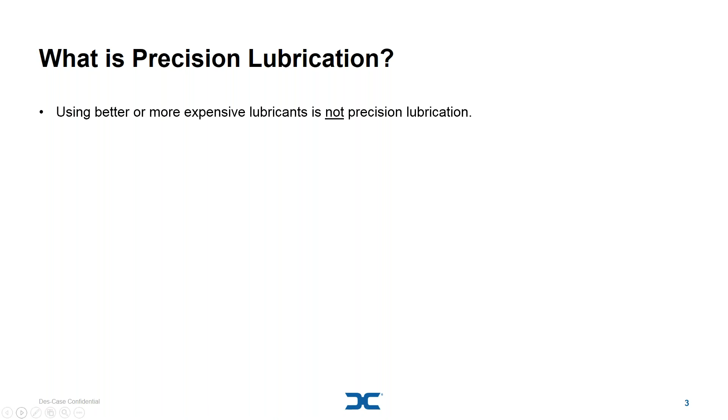First of all, precision lubrication or best practice lubrication is not about using better lubricants. Good lubricants don't necessarily equate to good lubrication. Usually that's not the case. I'm not saying that there isn't value in high performance lubricants or synthetic based products, but a lot of times the problems that we have with gearboxes are not related to the quality of the lubricant. There are other things that are more important or that are bigger contributors to the problems. And we're going to talk today about what those things are.

Likewise, lubricating your gearbox more frequently is certainly not precision lubrication. There's nothing precise about that, and it's not necessarily better. In fact, if we lubricate things more often than needed, a lot of times we simply waste time and waste resources. But in a lot of cases, we can actually cause harm by over lubricating things. Or, if we change oil twice as often as we need to, then we're really doubling the chance that we're going to do something wrong, such as fill to the wrong level, or possibly contaminate the lubricant when we add it, or use the wrong lubricant. So there's no reason to lubricate things more frequently than needed, and in fact, there is reason not to.

So precision lubrication or best practice lubrication really requires that we do quite a few things right, and that starts with lubricant specifications. We need to make sure that we're using the right oil, not necessarily the best one. We haven't gotten to lubricant performance yet, but we want to use the right one, the right viscosity grade and the right type of oil.

Then everything else that we do is really going to be about managing the condition of that oil. So we need to manage the health of that oil, which is the way we describe the chemical condition of the oil. So if an oil is in good condition in terms of its oxidation levels or thermal degradation, additive concentration, if all of that stuff is in good shape, we say that that oil is healthy. Then we also want to manage contaminants. So contamination control is going to be a big part of this, and that includes storage and handling, lubricant application methods. And then finally, all of this is made, I won't say easy, but made easier with education. If we educate all of our maintenance professionals on the fundamentals of precision lubrication, then we have a much better chance that we're going to get good results.

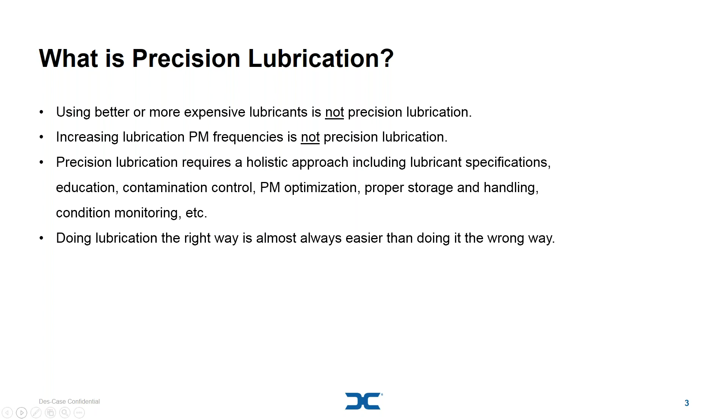Taking a good oil sample requires installation of a sample valve. We do that so we get good oil samples, but as a bonus, it makes it a lot easier to take the sample. So there's time savings, improvement to safety, environmental concerns, etc.

This is what we're going to talk about today with respect to lubrication for gearboxes. We're going to begin by talking about why it is that gears wear out in the first place—that will illustrate what we need to focus on for effective lubrication. Then we'll talk about lubricant selection, which will be really easy. We'll talk a little bit about PM development for oil changes, for inspections, contamination control or lubricant condition management, and then wrap it up with equipment modifications necessary to achieve those things. So again: why gears wear out, lubricant selection, PM development, contamination control, and finally equipment modification.

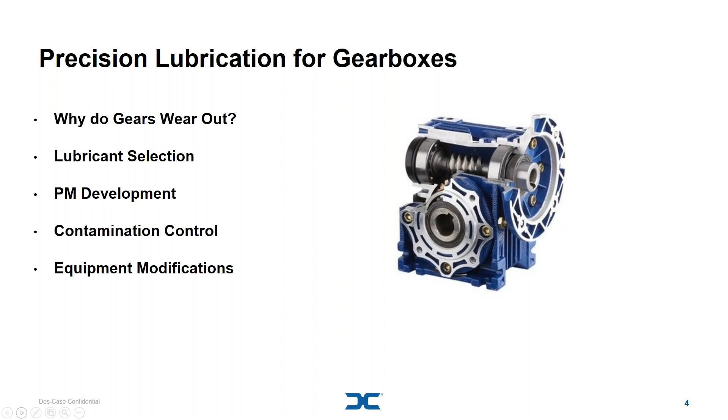So for our first section, why gears wear out. According to MIT, 15% of lost usefulness—what they call lost usefulness, I like to think of as lost service life—15% of lost service life is caused by machines just becoming obsolete, so sometimes we replace them with something newer and better.

Another 15% of the time, machines fail because we break them—accidents, either a mistake in installation or selection, or maintenance mistakes. But the vast majority of the time, lost usefulness or lost service life in our machinery can be attributed to surface degradation, which is what I call wear. So what MIT has told us here is something we all already knew: machines wear out. They're supposed to. That's the natural way that machines die, the natural way that we limit the service life of machines, by the rate of wear.

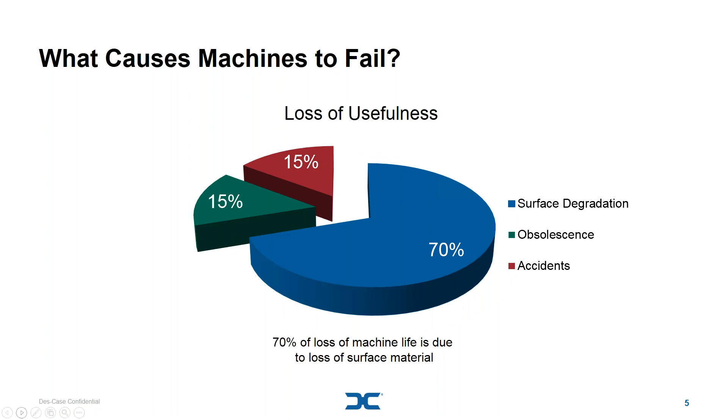So what kind of wear? We have a couple of different categories: corrosive wear and mechanical wear. Mechanical wear, of course, is the biggest piece, so that's the one we really want to focus on. But both of these types of wear are lubrication issues—one function of a lubricant is to minimize wear, another function is to reduce or prevent corrosion. So both are lubrication related, lubrication issues. But again, let's focus on the biggest piece—mechanical wear.

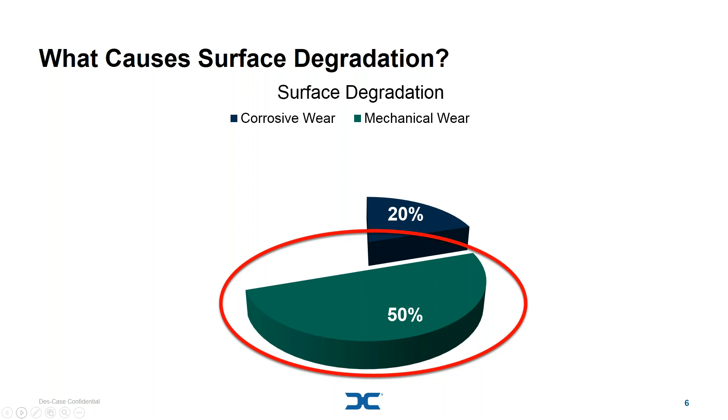If you look at the different types of mechanical wear, this information comes from a study done by STLE and the National Research Council of Canada. In this survey, they studied 3,722 wear-related failures in machines, and what they found was that in 66% of cases, the predominant wear mechanism was abrasion, 12% adhesion, 8% erosion, and 8% fatigue.

Now, adhesion—leave the other three aside for a second—adhesion is a type of wear that takes place when we have boundary lubrication conditions. That means we have metal-to-metal contact, and we don't have the proper film strength—we don't have the right type of additives, or the right type of lubricant in place. So adhesion is kind of an abnormal wear mechanism caused usually by improper selection of lubricants.

The other three—abrasion, erosion, and fatigue—are largely caused by one thing: lubricant contamination. So it makes sense that's where we should be paying a lot of attention. Particle contamination causes three-body abrasion, it can cause particle-induced erosion, and it causes particle-induced contact fatigue.

Water and air contamination also facilitate this particle-induced wear by reducing the film strength. Water and air also cause other forms of erosion—gaseous and vaporous cavitation. So my point is that the vast majority of machine wear is caused by contamination to the oil. The vast majority of lost machine life is due to wear. So if we can control the root cause, contamination, we can control the rate of wear in the machine.

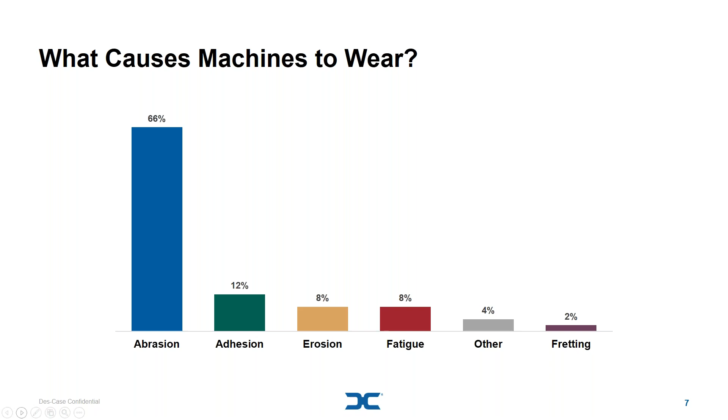This doesn't only apply to gearboxes, it applies to any lubricated machine. Inasmuch as we can control the quality of lubrication and contamination control, we can control the rate of wear in the machine, thereby optimizing the service life of the machine.

Lubrication for gearboxes can be very challenging, and one of the main reasons is that these aren't seen as very critical assets. Most gearboxes don't have circulating lubrication systems. If we had a circulating system, we'd probably have filters, an oil cooler, and a good sample valve to take good oil samples. But for a run-of-the-mill bath lubricated gearbox, we don't have any of these things.

So the oil level, when we don't have a circulating system, is very critical. The proper oil level for a typical bath lubricated gear is to completely submerge the lowest tooth on the driven gear. If you picture that, the difference between the perfect oil level and one that's too low is not very much. Having the right oil level is critical, and we can't just fill it higher because that causes a lot of problems too - it causes heat and aeration in the oil, which is very damaging.

So the oil level is very critical, and it can be challenging to maintain. There are startup issues with these, and that's not really something we can do anything about, but it is an issue with bath lubricated components. We actually have to run the machine to distribute the oil, so that creates issues on startup and certainly for storage.

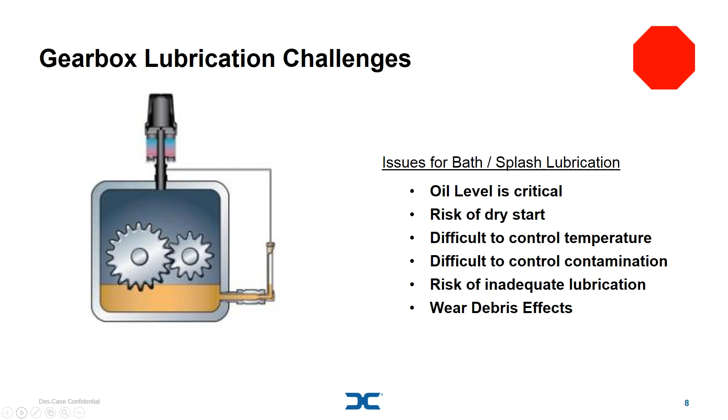Lubricant selection for gearboxes is normally really easy - we simply look in the book. We find the OEM operating and maintenance manual, look for the lubricant specification, and there we may actually need to interpret that information in some cases. Maybe it just tells us a specific product, and maybe that product no longer exists, or maybe it's made by a different manufacturer than the one we normally use. So sometimes we need to take that information and translate it into a more generic form so we can pick the right product from our inventory of lubricants.

Anytime we have a question on this and don't feel comfortable doing it ourselves, you can always call your lubricant supplier or lubrication consultant and tell them what the equipment manufacturer is recommending, and then they can recommend the correct product from their product line that'll fit that.

Now, from time to time we may actually come across a gearbox that's very old, or it may be a custom gear set, or for whatever reason, we don't have that information from the equipment manufacturer.

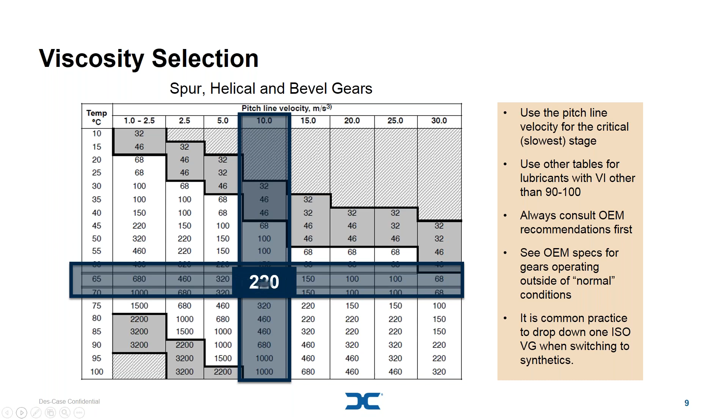So now that we have the right viscosity grade, in order to select the right lubricant, we need a lubricant type. So we're going to have to choose an anti-wear oil, an R&O oil, or an EP oil.

In the case of our AGMA lubrication standards, there's not a number here, there's not a formula, there's not a calculation. It's really a little bit subjective. In this case, they're telling us if we have moderate to heavy shocks on our driven unit or the driving unit, that we should use an EP gear oil. If we have light or uniform loads on both of those, we could use an R&O oil.

But here's the thing, it's very difficult to know. Like I said, there is no calculation, at least one that we could do reasonably, that would tell us EP or non-EP. So when in doubt, for all of our reducers—now this doesn't really apply to high-speed gears—but for all of our reducers, when in doubt, use an EP oil.

There are multiple types of EP, but our standard EP oils are sulfur phosphorus oils. And there are some times that we don't want to use sulfur phosphorus additives in our lubricants, namely with yellow metals. We're not talking about worm gears at the moment, but it deserves mention that sulfur phosphorus additives should not be used with worm gears, because sulfur phosphorus additives are corrosive—that's actually how they do their job, and they may be particularly corrosive to yellow metals. So we don't want to use them with worm gears, but we use them with just about everything else.

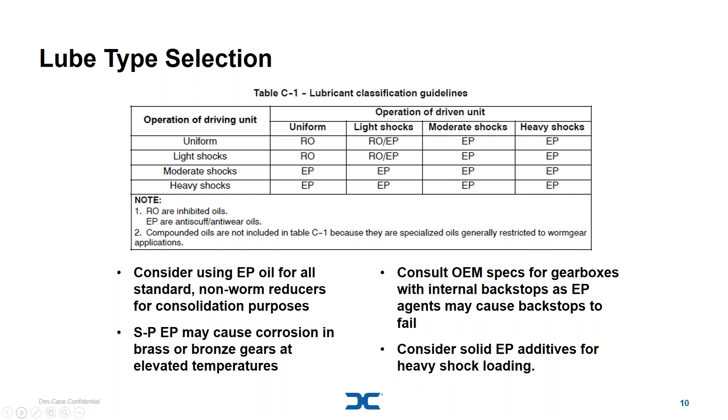Consult the OEM documentation to make sure you're using the right type of oil, because an EP oil can actually cause a backstop to fail, potentially creating a big safety hazard. There are other types of EP additives, so if we have an asset with very heavy shock loading or very severe boundary conditions, there may be times when we want to use a solid EP like moly or borate or some other type of solid additive.

Moving on to our next category of gears. Remember, we have non-worm gears and worm gears, but we're going to treat worm gears the same way with respect to viscosity selection. So if we have a certain temperature range and a pitch line velocity less than 2 1/4 meters per second, we're going to use a 680. And if it is above 2 1/4 meters per second, we're going to use a 460.

Traditionally, we use compounded oils for worm gears. Some people call this cylinder oil. It has a special lubricity agent that is very good for the type of contact we see in worm gears. Again, we don't want to use sulfur phosphorus, because if there are boundary conditions, it will likely be very corrosive to the yellow metal surfaces.

If we have an extreme case for a worm gear, if we need improved lubrication or improved film strength, a lot of times people go with a polyglycol gear oil that is actually specifically designed for worm gears. A lot of manufacturers make a high viscosity PAG oil specifically for worm gears, and it has really good lubricity and good wear preventing properties.

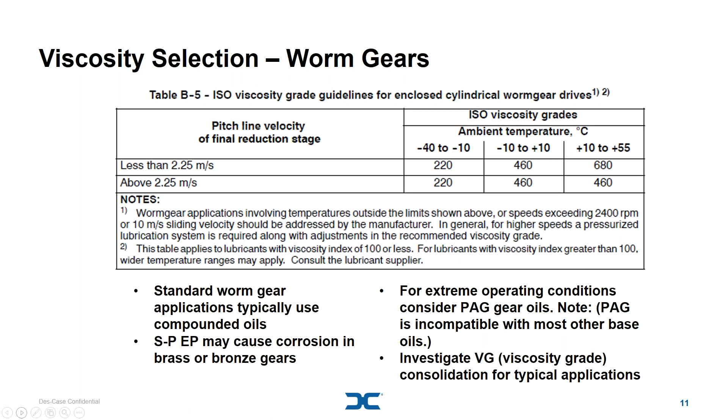Finally, if you have half a dozen gearboxes that use ISO 460 and you have 50 that use ISO 680, there's a good chance that you could use the 680 in all of them. That's something to investigate. We don't want to take a chance, but we want to verify that it's okay. Most machines can run on more than one lubricant. There's usually not one correct lubricant for a certain application. Usually they'll run on a range of viscosity grades, and often a range of viscosity types. So that's lubricant selection.

That's the first piece of precision lubrication. Now we need to focus on how we manage the condition of that oil, and the big thing there is going to be contamination control. When we control contamination, we need to follow a strategy. We shouldn't just say let's use filtration, or let's use good breathers, or let's upgrade our filters on our circulating systems. The right way to do it is to first identify how clean the oil should be.

We use particle count to measure that, or the ISO contamination code or ISO cleanliness code. We need to set a target for particle count, and a target for moisture limits, those being our two primary contaminants that we're concerned with. Then the next thing we need to do is figure out how we can actually achieve those targets. We're going to talk about what most of those things are in just a moment, the various measures we can implement to achieve our cleanliness targets.

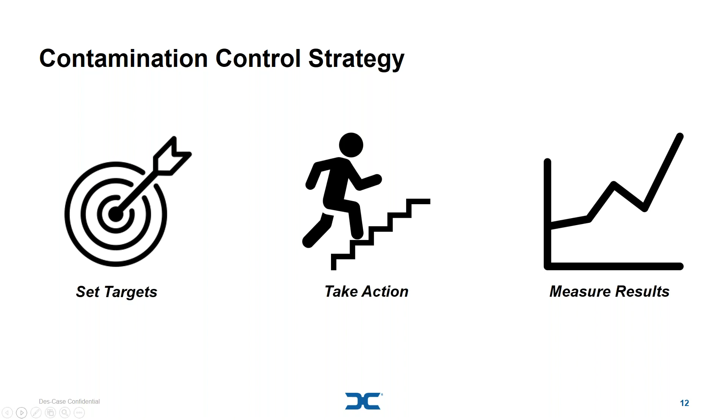Finally, we need to be able to effectively measure if those actions were actually effective, so we need to be able to effectively measure the particle count and the moisture concentration. That means good sampling and good oil analysis.

So for step one in contamination control, we need to identify our target. For gearboxes, this is a good one: 19/16-13. It's a little ambitious, frankly. That's going to be hard to achieve unless you do things very well. It will require lubrication best practices with a bath lubricated gearbox, one that doesn't have a filter built in. It's going to be challenging to hit 19/16-13.

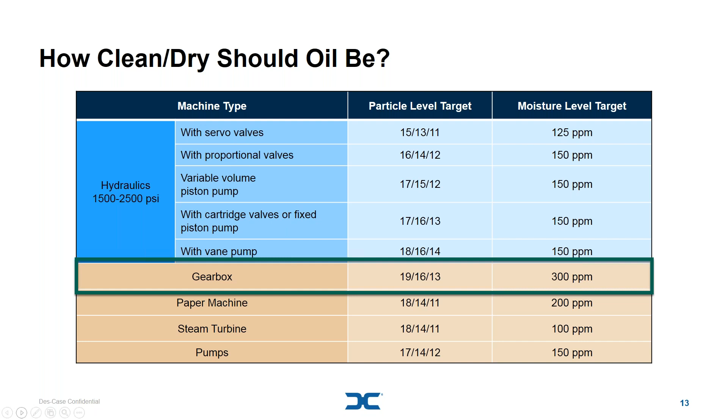And a good moisture limit would be around 300 parts per million, which would probably be around the saturation point of the gear oil. We typically want to be below the saturation point of the oil when it comes to our moisture limit, so that we don't have any emulsified water free in that system. A lot of times actually achieving that target is going to cost - we're going to actually have to change the way we do some things. We may have to install upgraded components in order to achieve those.

So how do we justify that? We know that's how clean the oil should be, but why? What is that actually going to get for us?

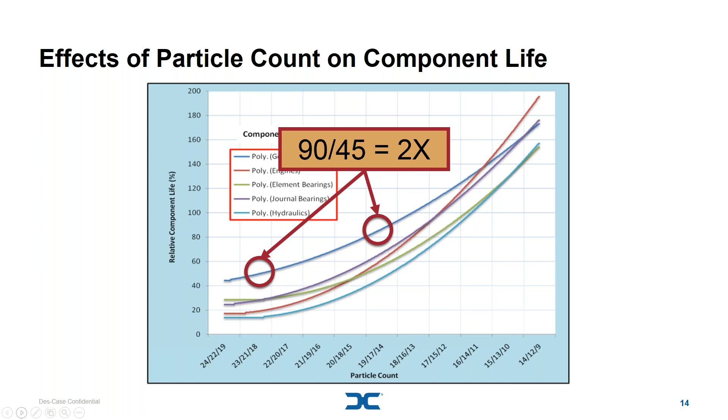And it really is that easy. It may not be easy to do it - a lot of times it takes some effort to actually hit that particle count - but at least theoretically, it is that easy.

So water certainly does cause corrosion, but that's not the primary way water causes damage. The primary way water causes damage is by reducing the film strength and thereby the film thickness, separating interacting surfaces in the machine. So the machine surfaces get closer together and more bad stuff happens.

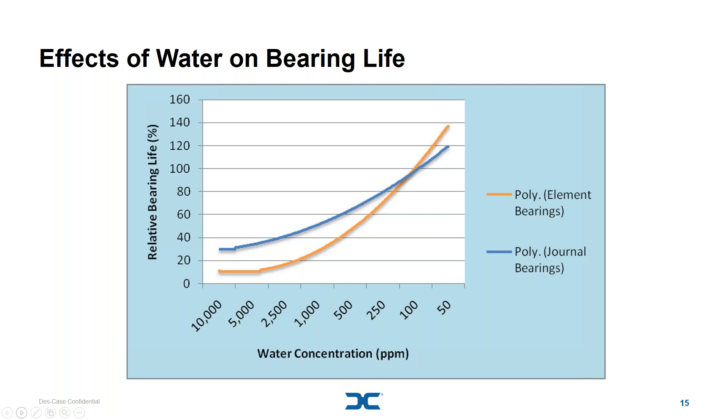Now, I always like to include a case study in short courses like these. It's hard to find good case studies on gearing because, like in the example I just mentioned, we're talking about causing a machine to run 10 years instead of 5, so it takes a long time to collect that data. But I have one here that is for final drives on haul trucks.

This is a particular copper mine, open pit mine. They've done many things to improve lubrication, but one of the many case studies they did was using offline filtration for final drives on haul trucks.

In this case, every time they had the haul truck down for an oil change, every 500 hours, they would take a filter cart and filter each of the final drives. They would do this while they were doing other things, so they didn't take it out of service - it didn't take extra time or anything.

The direct result of this was that their mean time between failure on final drives went from 9,000 hours to 13,000 hours. And their maintenance cost per operating hour per final drive went from $2.11 to $1.36 per hour.

So that's about a 36% reduction. And at the same time, they increased the life of the oil from 2,000 hours to 6,000 hours.

Differentials and final drives and a lot of geared applications have a lot of metal in them traditionally. So when that metal, in addition to causing more wear, also causes damage to the oil. It promotes oxidation. So when you remove that, the oil can last a lot longer. That's why we see a 3 times improvement in oil life here.

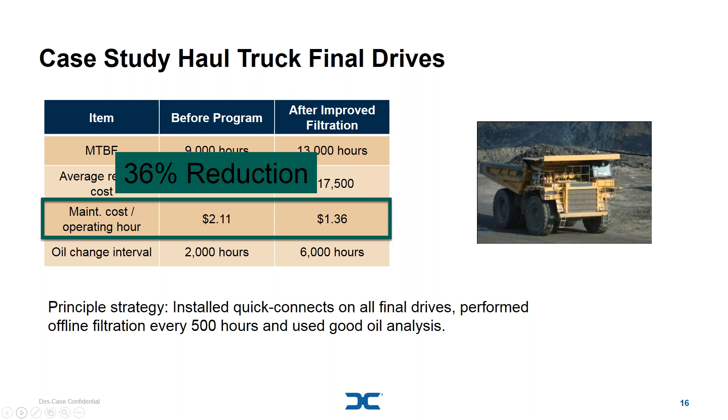So what are the things that we can do to actually control contamination? Well, the good news is that the vast majority of contamination in gearboxes comes from just 2 places. It comes from the new oil that we add to the sump, and it comes from the air that the case breathes. Those are 2 things that are, at least theoretically, very easy to address.

We can simply filter our new oil. Now, those of you that have tried this will probably know that it's not really as easy as that. Just filtering new oil doesn't ensure that we get clean oil in the machine. That can take some effort.

As far as the air that the sump breathes, there's several different headspace management techniques, but good quality breathers go a long way towards preventing particles and moisture from entering the sump. We can also use good application methods, and that's why I say there's more to it than just filtering new oil. We have to use good handling tools and good methods to get clean oil in the machine.

We could upgrade seals. We need to utilize non-invasive inspection and sampling methods. This means using sight glasses as opposed to dipsticks and level plugs. It means using an installed sample valve instead of dropping a tube into the sump or sampling from the drain line. And it also means using good flushing practices for new equipment.

So we have startup cleanliness, and even managing our spares well. That's unfortunately all we can do for a lot of our gearboxes. There's just not, we really can't justify, it's not practical in many cases to use filtration on gearboxes.

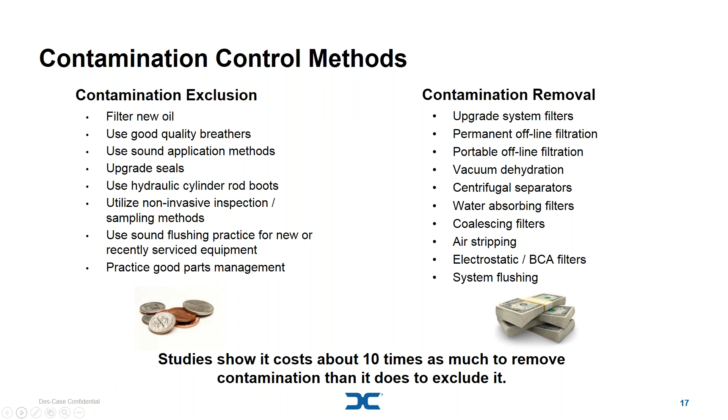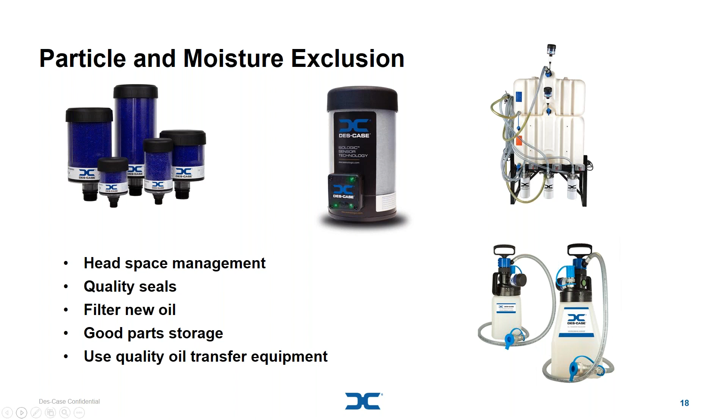One of the best ways to do that is with good headspace management. We can also upgrade seals in many applications. We certainly want to practice good storage and handling. We definitely need to filter our new oil and use good quality transfer equipment, and also manage our parts well. If we have spares sitting on the shelf, we need to think about contamination control and lubrication considerations with that stored equipment. But the big topic here for gearboxes is headspace management.

Again, most of the contamination that gets in our systems comes from new oil that we add to it. That accounts for a lot of particle contamination, but the vast majority of moisture contamination and a lot of the particle contamination comes through the breather. Most OEM breathers don't do a lot to stop particle contamination, and most of them do nothing to prevent moisture contamination other than keeping out rain or water from washdown activities.

Most of the water that gets into lubricated systems actually comes from condensation. Many manufacturing environments are very humid. So when humid air enters the sump, then the air cools down later, you get condensation inside. Anybody that has a boat with a fuel tank knows this. You always have water in the fuel tank on a boat because it breathes.

You get humid air inside the tank, it cools down, and you get condensation. That condensate falls into the fuel or into the oil, and you have water in the system. So the easy way to prevent this is to simply use a breather that stops the moisture. A desiccant breather will pull moisture down to about 25% relative humidity.

There are other ways we can do this. We can use a hybrid style breather that incorporates an expansion chamber, or just an expansion chamber that traps the volume of air to be exchanged, preventing exchange with the outside ambient environment. We could also purge the headspace with dry air or nitrogen, or even use an oil mist system nearby, running it into the headspace to prevent anything from coming in.

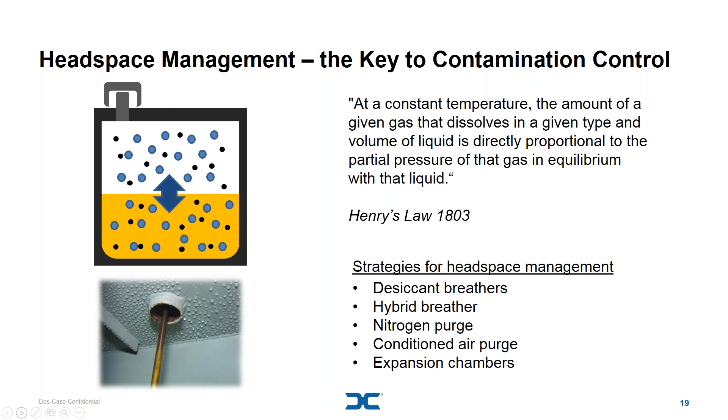So in this case, we're actually using the filter cart to remove the waste oil, which gets the old oil out faster and more completely, which is a good thing. We have bypass valves on the filter cart that can isolate the filters so we don't have to run the old oil through them if we don't want to. Then we reconfigure the system and pump new oil through the filters into the case.

And in this case, they've actually taken that a step further. Once they've added the new oil, they reconfigure so they can circulate the oil in the case and make sure that it's clean.

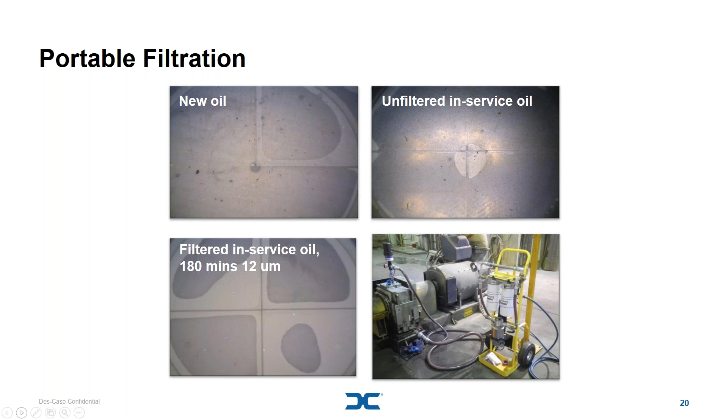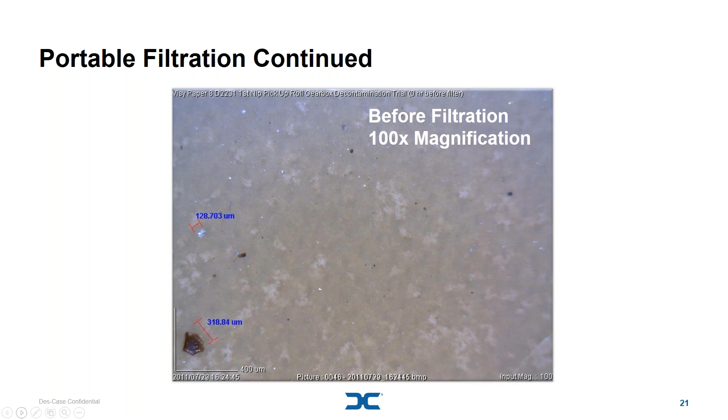This is a microscopic examination of those patches. Here we see the unfiltered in-service oil, and as you can see, we have some very large particles in there and a whole bunch of small ones, most of which are very damaging to our gears. Then in the next picture, we see a microscopic examination of the filtered oil.

When you consider that those particles we see on those slides are the number one contributor to machine wear, and really the ultimate determiner of the service life of that asset, it certainly makes sense that we could get twice or even three times the life out of a gearbox by going from the previous oil to this oil.

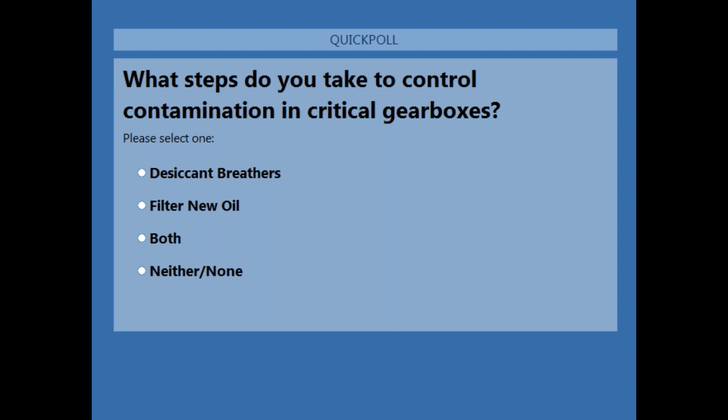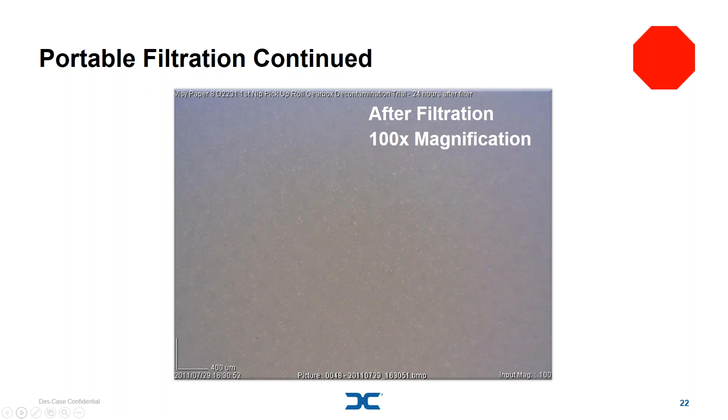So now that we've talked about how to select the right oil for a gearbox - that's easy - and how to manage the condition of that oil, how to prevent and remove contamination - not necessarily as easy - we need to talk about another aspect that enables all of those things: modifications. Usually when it comes to implementing precision lubrication, this is the physical work that has to be done, in terms of changes to the equipment and the program.

If we want to use filter carts to change our oil instead of traditional methods, we need quick connect fittings on our reservoirs so we can actually use the filter cart. Otherwise the filter cart is pretty much worthless. So this is a huge issue, a huge part of implementing precision lubrication.

If we want to take an oil sample, especially on a gearbox, we need to install a proper oil sample valve so we can get good samples efficiently. If we want to prevent moisture and particles from entering the headspace, we need to modify the sump with a breather, an air purge, or something else.

There are basically three reasons that we modify equipment. We modify equipment to enable certain lubrication activities we may not be able to do now, such as adding oil with a quick connect hand pump top-up container. So we need modifications for lubricant application.

We need modifications for inspection. If we want to check the oil level regularly, we need a sight glass. Level plugs are really inefficient and a good way to contaminate the sump, and dipsticks are also a good way to contaminate the oil. Finally, we need modifications for contamination control. So we need modifications for lubricant application, contamination control, and inspections.

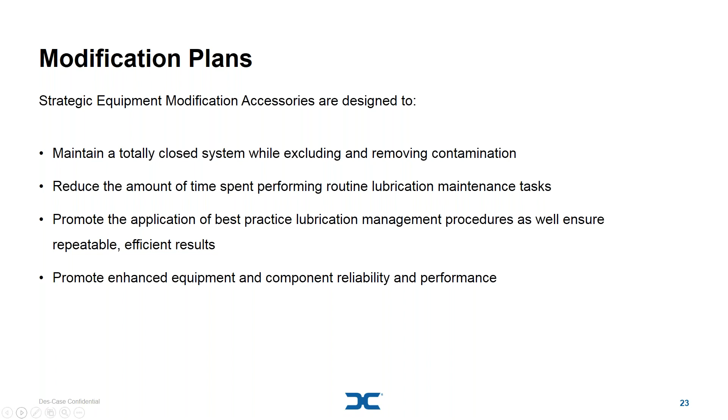This process of modifying equipment can actually take many years. I'd say on average, if you really went at it, it would probably take about 3 years to modify all of the assets in your plant - not because it's such a big job or because there's so much work to do, but because it requires access to the equipment, and in many cases requires that the asset is down.

If we're going to add a sight glass or a sample valve or something below the oil level, we've got to shut the machine down to do that, so the right time to do it is normally during an oil change. If it's something above the oil level, like installing a breather or a quick connect so we can add oil to the sump, that's something we can do right away.

But the first and most important step in this process is to identify the preferred configuration. You don't necessarily have to do a modification plan for every single asset in the plant - you can create a few templates that make this entire process pretty easy.

So for all of your gearboxes, you may need 4 or 5, maybe 6 different templates that you can apply to all of them, depending on what type of modifications you want to do and what type of gearbox it is. A lot of times, what type of gearbox it is will really affect where we install things, since different gearboxes will have ports available in different locations.

So again, the crucial first step in this process is to identify the desired result, identify the preferred configuration, and then create a parts list with any specialty parts that have to be ordered to do that modification. Then it can be scheduled efficiently when that equipment is available.

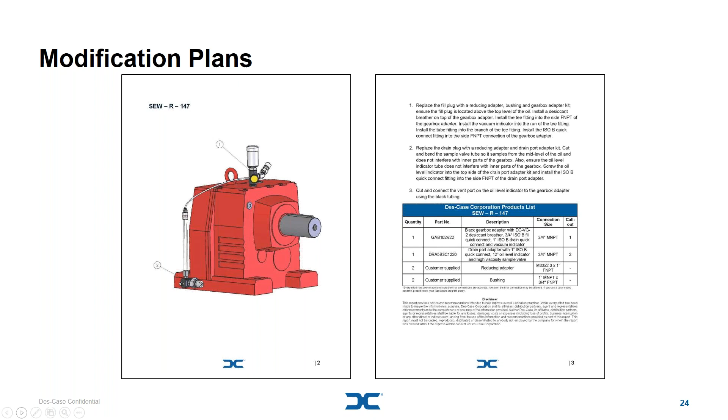Like I said, there aren't a lot of different configurations we need for gearboxes. It depends - in this case we have a gearbox that only has 2 ports, so we use combination fittings that allow us to put all of our accessories into just a couple ports. At the top we have a breather and a quick connect fitting. On the drain port we have a quick connect fitting, a BS&W bowl, a sight glass, and a sample valve - all of that in just 2 ports.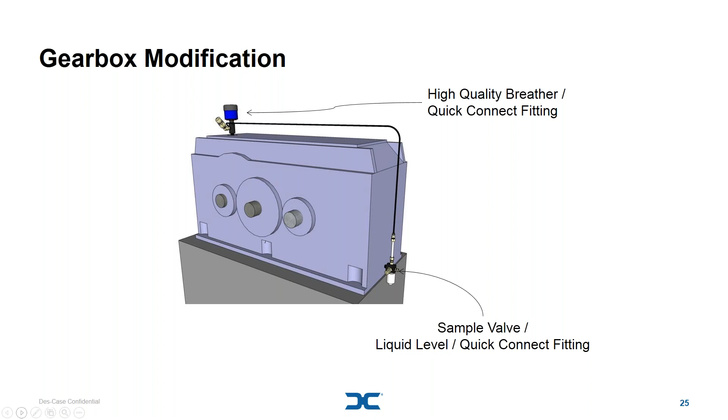So the last thing that we really have to do in precision lubrication is verify.

So now that we've selected the right oil, we've designed the contamination control process, and we've modified the assets so that we can actually do those things. So we can change oil the right way, control contamination, and prevent contamination. Now we have to be able to verify that it actually worked.

So oil sampling is a critical first step in oil analysis. Oil analysis is a whole topic of its own, but to me its primary value is often overlooked: it's a proactive condition monitoring tool. A lot of people use oil analysis to figure out when to change the oil, and that's fine. A lot of people use it to figure out if a machine is wearing badly, and that's also useful.

But what I really want to know from oil analysis is basically the things we just talked about: do I have the right oil in the machine? Is it healthy? Is it suitably free of contaminants, suitably clean and suitably dry? In that sense, oil analysis is a proactive condition monitoring tool that tells me how well I'm lubricating the machine. And if I roll that up for all of my machines, I've got metrics that tell me how well I'm lubricating my entire plant. So it's a very useful and sometimes overlooked aspect of oil analysis.

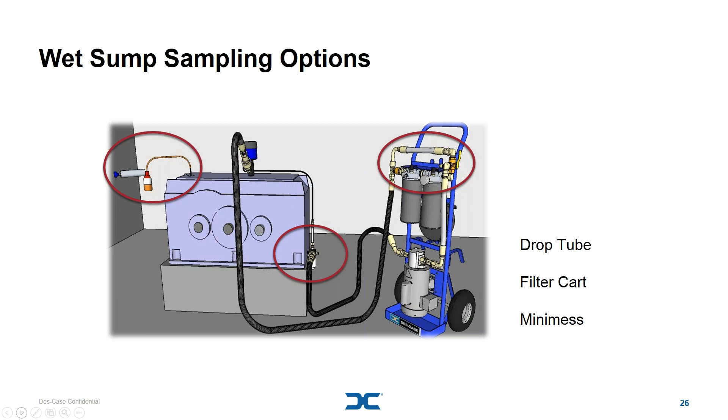So first, for drop tube sampling: this is probably the hardest way to take a sample, and unfortunately, it's not a particularly good way to take a sample either, even though this is the way people sample when they're trying to get a good oil sample. The main problem with drop tube sampling is that we don't know where the sample's coming from—you can't see inside the gearbox. Sometimes it's hard to even find the oil with a piece of flexible tubing that came in a coil and has a kind of screw-shaped set to it, so it's going to be challenging.

If the asset is running, which is preferable when we take a sample, you could actually put the tubing into the moving parts. So it's really challenging to get a good sample, and it's almost impossible to get a consistent sample this way. But in general, if we must use drop tube sampling, if that's the best sampling method we've got, we want to try to sample as consistently as possible and try to get the sample extraction point at least 2 inches away from the bottom of the sump, from the sides, and certainly away from any rotating components.

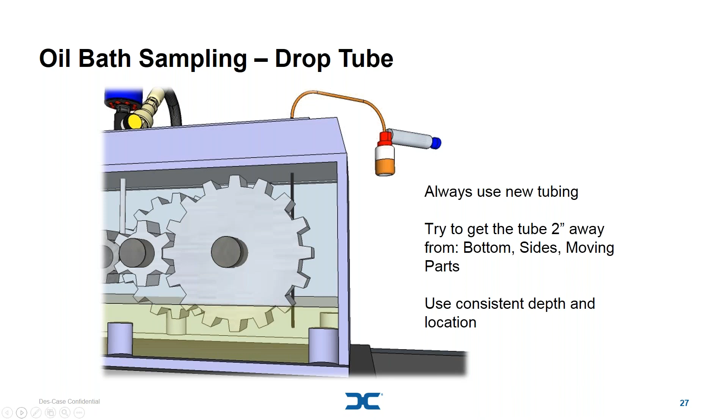The best way to do this is to use what people sometimes call a standoff method. We can take some kind of rigid implement, like a welding rod or a graphite rod, and fix the sample tubing to that rod. By doing this, we can insert it into the sump. The idea is that the standoff or rod would actually touch the bottom of the sump, and that way we would establish the height of sampling.

So in general, we want to try to sample from about the midpoint in terms of depth in the reservoir, and we don't want to sample over in the corner of the sump or anything. We want to try to get into that live working zone where the oil is actually moving around. So that is one adaptation or modification of typical drop tube sampling that really alleviates some of those problems.

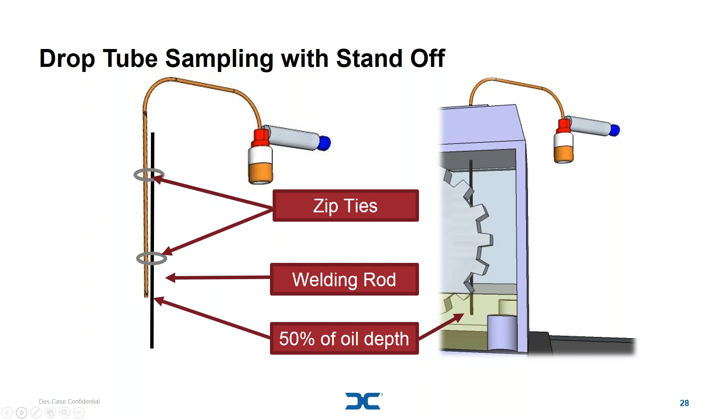So the last thing that I want to leave you with is what to do with gearboxes when we store them.

So if we have to shut down a gearbox for an extended period of time, or if we're caring for our spares that are stored on a shelf in the warehouse, the main thing we need to address is the fact that everything above the oil level inside the case is dry. It doesn't have lubricant that protects it from water or other contaminants that might get into the system.

We need to prevent corrosion, because the two main issues here are the potential for corrosion of those exposed parts, and a problem called false Brinelling, where we can actually damage bearings that are sitting. It essentially creates a flat spot on the loaded bearing surfaces. So we need to address the corrosion, and rotate shafts periodically to prevent this false Brinelling issue.

There are several ways we can address the corrosion. To address the false Brinelling, we simply need to rotate the shafts, probably at least once a month, while they're in storage or sitting idle. As for corrosion, we could take the breather off, completely fill the case with oil, and put a plug in it. A lot of times that's a good recipe for leaks, so that's not always the best solution.

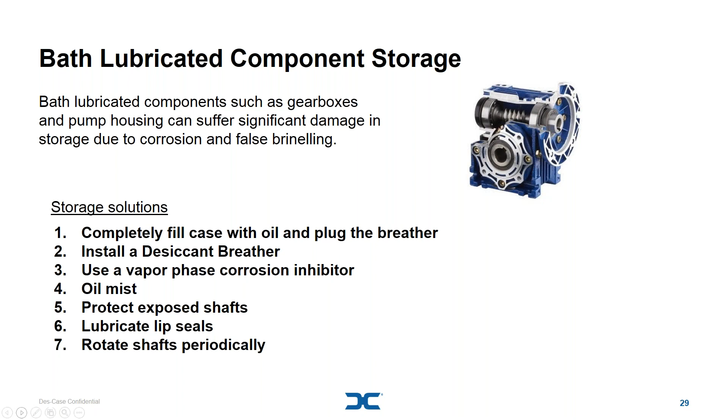Hey Jared, yeah we do have a couple. This first one is from an oil distributor. They have a prospect willing to do a test on a sample desiccant filter for a gearbox. Is it as simple as putting the breather on and waiting for it to change from blue to pink? Or should oil analysis be a part of this testing process to check for moisture and contamination throughout the test?

So if I understand the question correctly, you're asking if I install a desiccant breather, do I just presume everything is good and not test it? I would say you absolutely need to also do oil analysis. In a very real way, a desiccant breather, at least with respect to moisture, also serves as a type of condition monitor. This is especially true with connected products. But if we see a rapid change in saturation—if the breather is good for weeks and then all of a sudden it turns pink overnight—that's telling us there's another ingression problem.

But humid air is not the only way that moisture gets into the sump. Oil analysis is a critical part of any contamination control measure. We want to use oil analysis to verify that we have the correct oil, that the oil's healthy, and that it's suitably free of particles and moisture. So I guess that's a really long way of saying yes, you should totally do oil analysis.